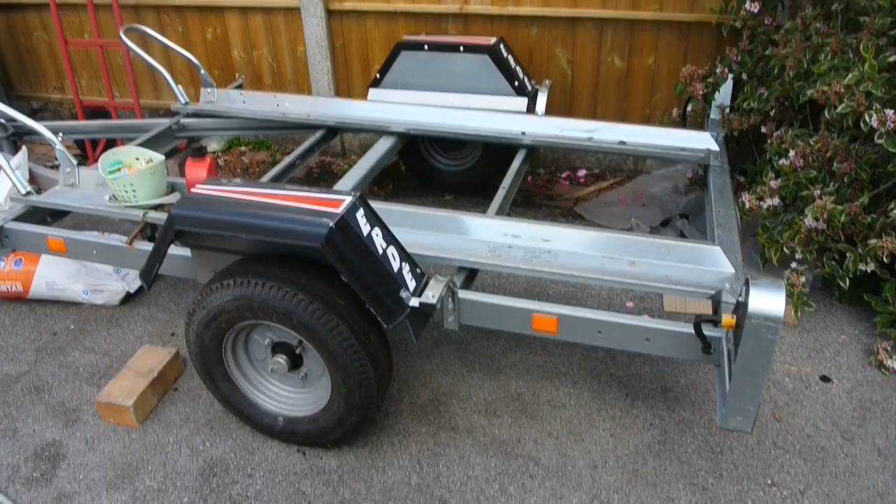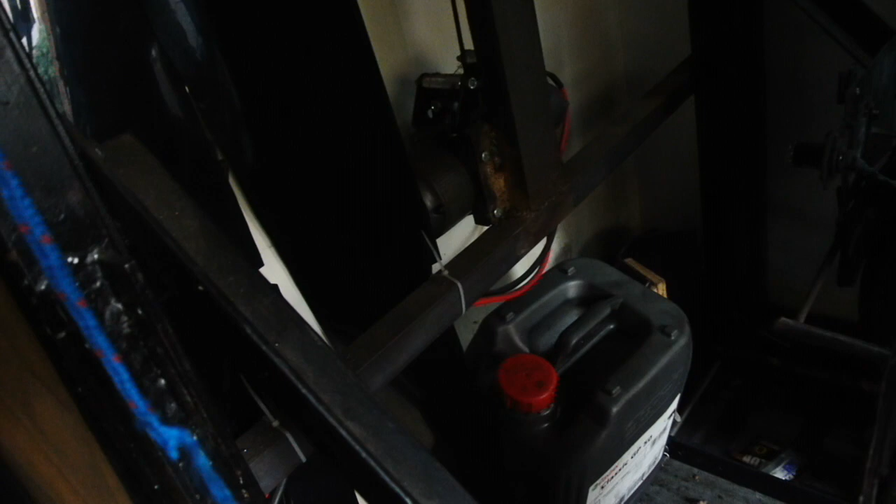It comprises some channel along the ground with a vertical here and 4 pivoting legs, 1, 2 and of course 2 on the back, and there's a dirty great winch in the back there which you might just be able to see, which is connected to this 12 volt battery here, and a switch on the back of the panel here, and it can be used to raise and lower the bikes.

I've had 4 bikes stored in this area, 2 on the top and 2 on the bottom before. It's quite capable of lifting very heavy stuff. It's a pretty powerful winch. Anyway, at the moment, there you see my Humber 350 overhead, horrible exhaust. Do ignore that. That was an experiment gone wrong.

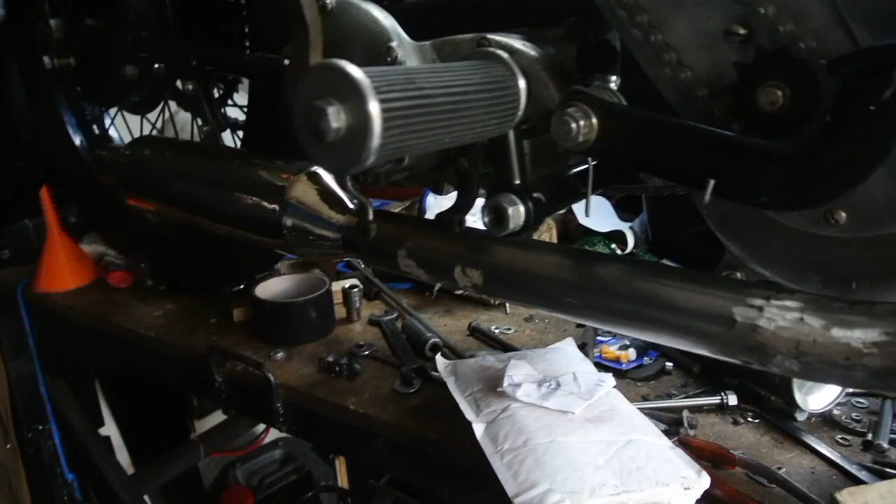But there we see the progress. It looks a lot worse than it actually is because it's almost finished. I'm just waiting for parts back from powder coating and so on, and it's going to be assembled and checked out when I get an exhaust for it. And there we go, there's my...

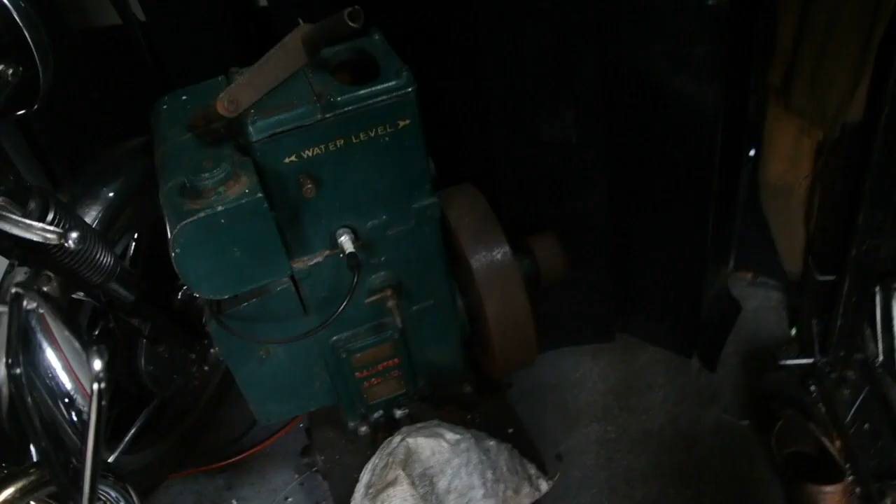Workshop's divided into 3 areas, all of them untidy, which is probably my hallmark, I think. As you can see, shelves everywhere, all along the top, covered in all sorts of stuff. That along the back there's all Humber 350, overhead cam, overhead valve, and even a whole engine in the corner.

If anyone's after a Matchbox float, there's one in that box untouched. Speak to me later and you might be able to buy.

Now then, we'll come through here. These are curtain doors, really good for in winter time. It kind of stops losing heat out of here, and they're just quite effective, you know. They separate the 3 areas. You don't get too much dust and muck from the dirty end of the workshop, which is up at the far end, travelling this far up.

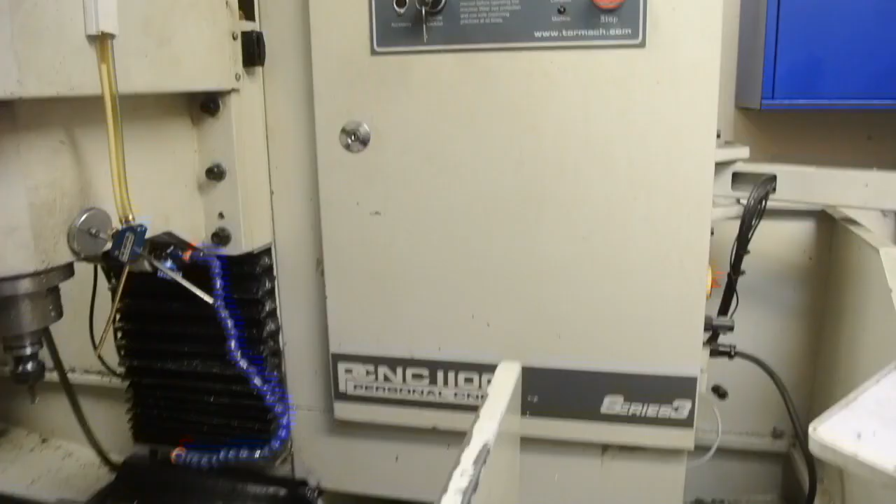So here we go, and this here is the workshop area, which is, I think, what most people were wanting to see. It's very hard in here to get any decent shots of everything because it is very cramped. It's a good little machine actually. It's brilliant, in fact. It's equipped with 4th axis. That's this thing here. So it's more than just a milling machine.

You can generate compound surfaces with it by holding them in here. This can rotate back and forth, and move this way, and this way, that way, and this head can move up and down. So you've got 4 axes. You've got Z, Y, X along the bed, and A, which is the centre line of the rotary table. So that's the machine there.

Another thing with this machine is, I can't really show you it, but underneath here, in that big brass cover, or underneath that, is a lathe attachment, and it's quite good. There we go. There's a screen coming on.

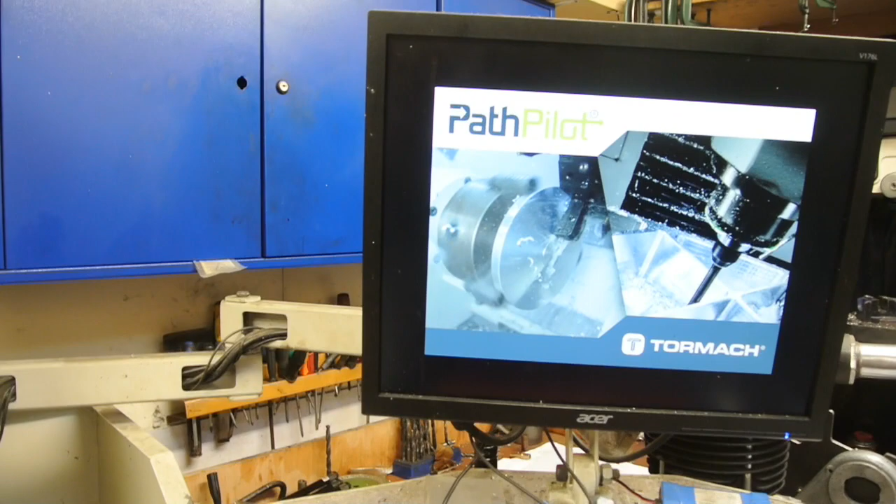Oh, there's someone on a motorbike making a hell of a noise. The A34 isn't too far away from me.

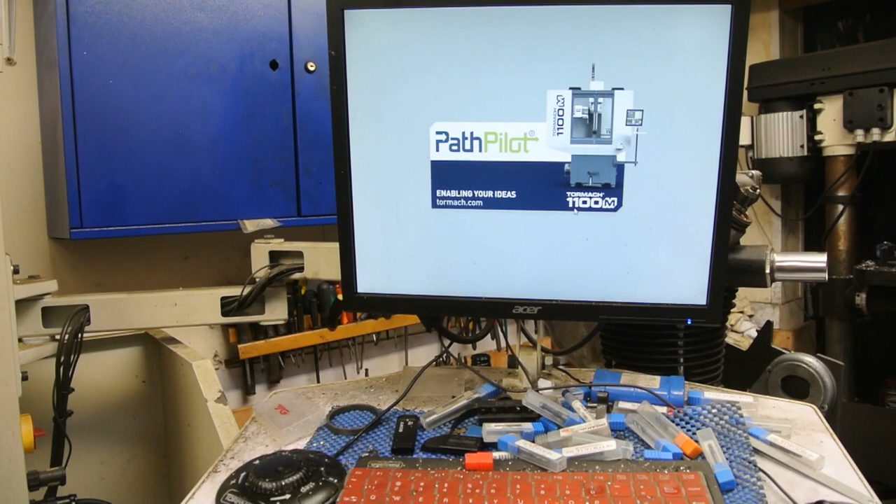And then it tells me there's some kind of fault, and then it comes on. You should say Tormach. I imported this from the States in about 2014, 15, and it cost a lot of money to get it into the country, but it's been worth its weight in gold to me. It really has. It's just so nice to use, very easy to use. It's quite a robust machine, and it does work well.

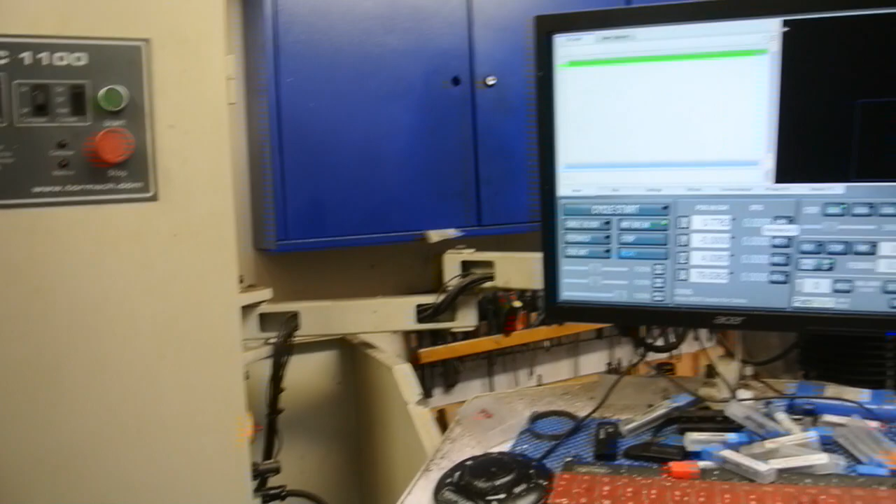So anyway, there we go. That's it on. This is the control. It's controlled by a PC, which is hidden away in the cupboard underneath, and we'll just reset it. And the first thing you ever do is you reference your... and I'll have to be careful because this is very high and it can actually catch on that, so you want to reference the Z first as it goes up. Oh, I can't just do that quite yet. I need to reset that button. There we go, and then I can hit the Z.

And there you see, it's pretty slow this. I need to investigate that. It should go faster than that when it's referencing. But that's Z, and that's clear of the rotary table. X. And there you see the X. And let's click on the Y.

And that's it referenced, so you can then move in the X direction, Y direction, etc. And A, which is the rotary table, and there you see it there.

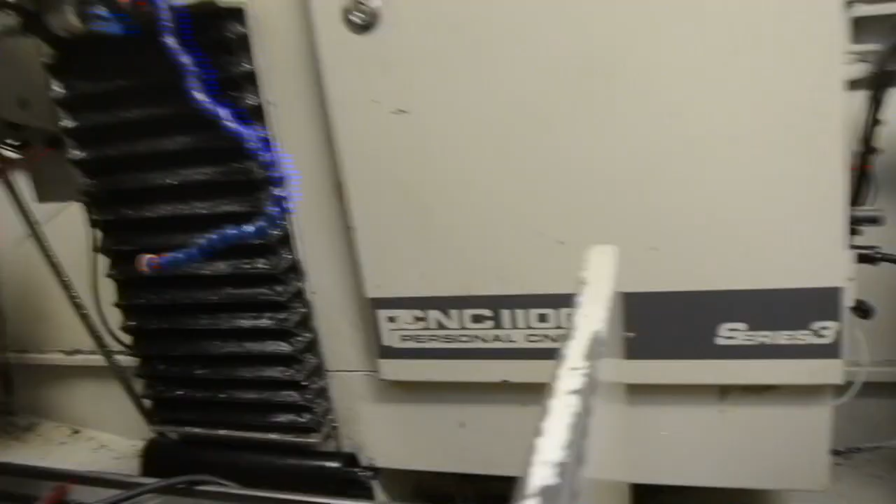I had a lot of problems with this last time I used it, and I couldn't figure out what was wrong, and it turned out to be some bad contacts in this plug here. And it was so frustrating because I was trying to divide something, and it made a right balls of the job. But anyway, that's another story.

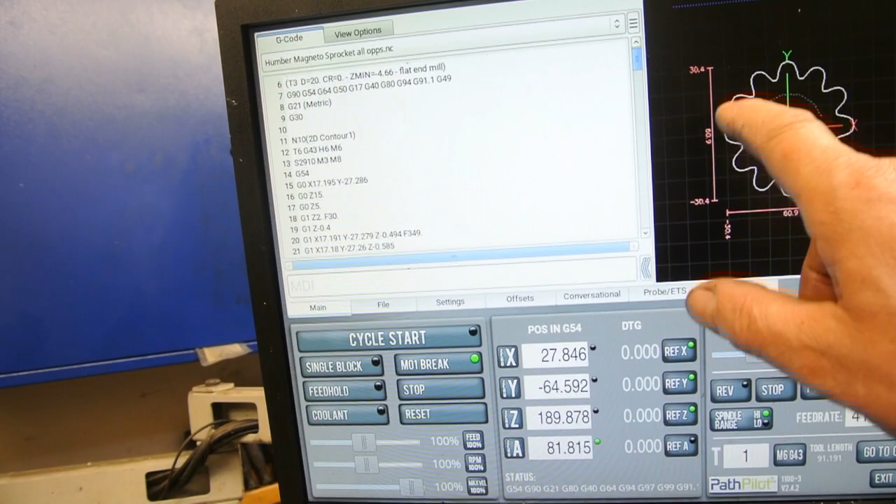And if you look at this, you can see this shows you the tool path that the cutter makes. 6mm cutter, which is actually in there, and it's a 12 tooth sprocket. So there we go, 1 2 3 4 5 6 7 8 9 10 11 12. It looks kind of odd because it doesn't look like a sprocket, but what you've got to remember is it's being cut with a 6mm tool, and it does actually cut a nice profile.

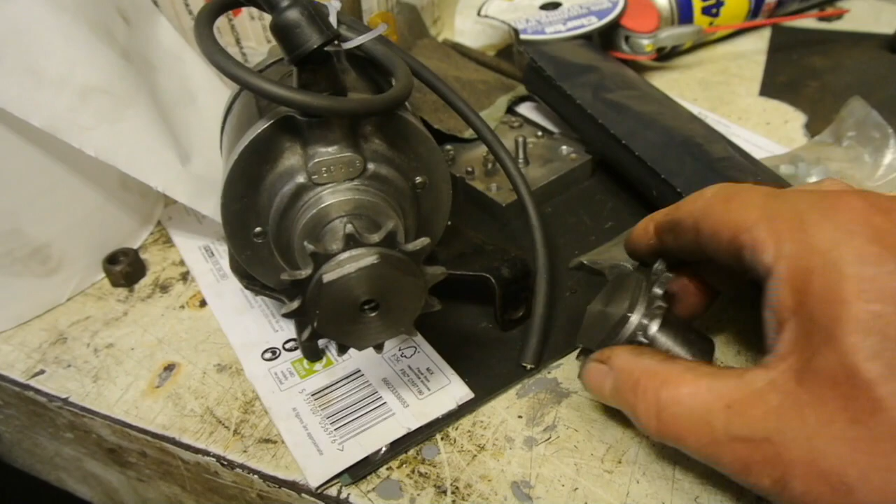In fact, I can probably show you the finished article because I've got one here. In fact, I've got two. There's one fitted to a magneto. What we're talking is the body. This part here is the body of this, and that's the sprocket there.

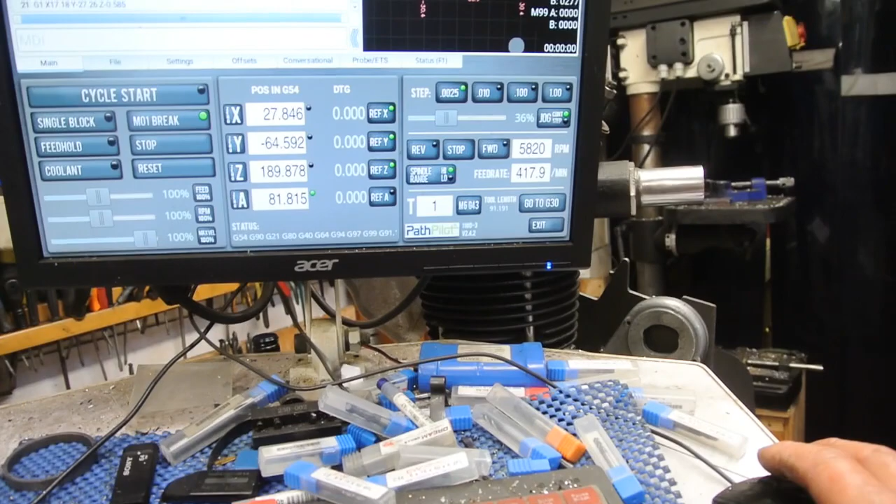So I'll show you what there is on that program. We can maybe run it. That's just the magneto sprocket. So there's 13 holes to be drilled in that. So if I take an isometric view of it on the screen, you will see here 1 2 3 4 5 6 7 8 9 10 11 12 13 holes, and that's the program there that will drill those holes.

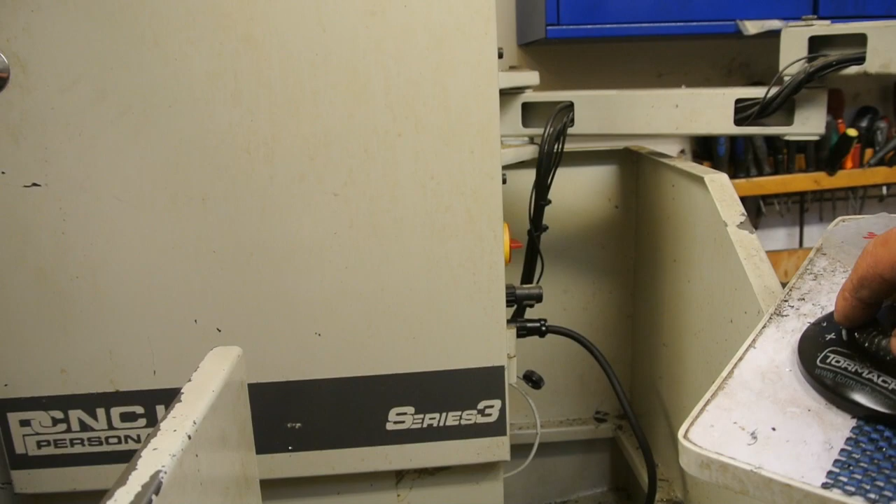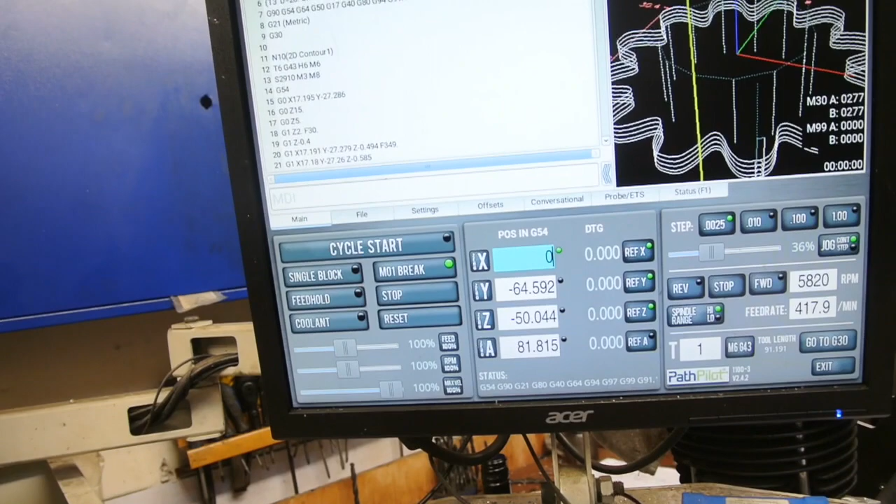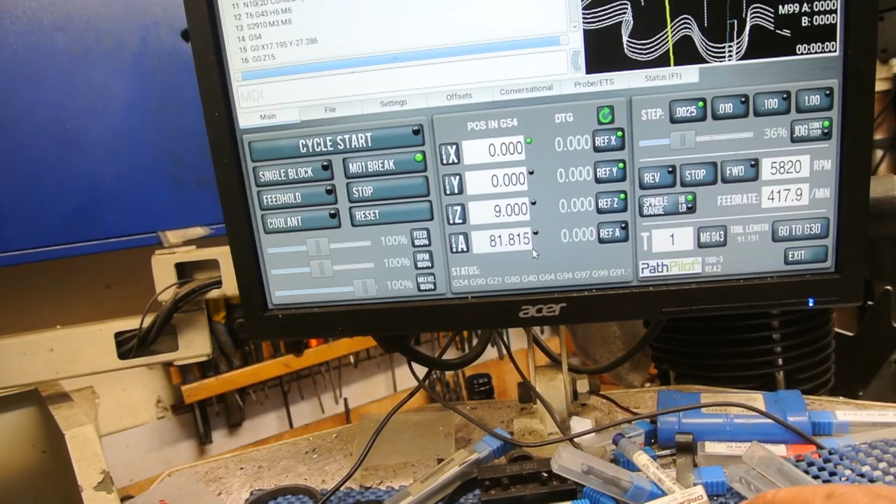I could show you it if I go down here, just say that I don't want to run it into the table or anything, and I want it to be well clear of that head there, so I'm going to say that X equals 0 here. This is reference point for everything. Y equals 0 here, and Z equals 0. Whoop, 0. Come on. 0, enter.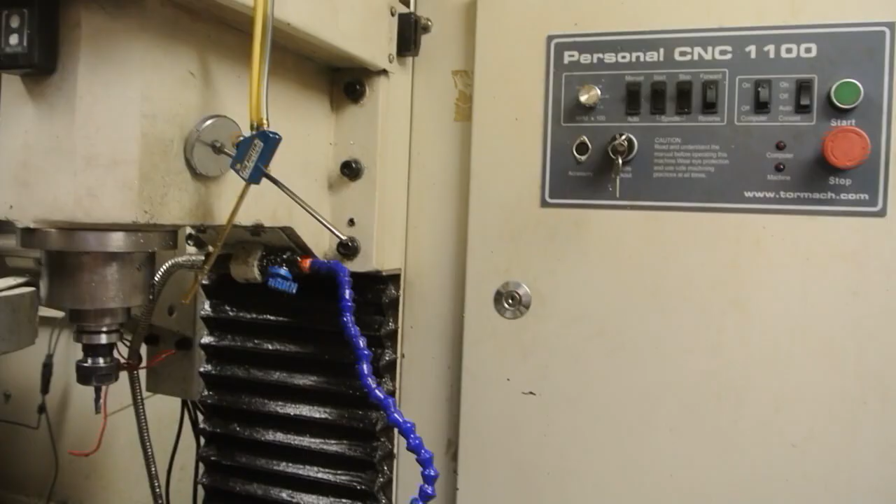I'm just going to turn the coolant off because I don't want coolant flying all over the place. But in theory, I should be able to hit the start button and it should run. So we'll hit the start button, and there you see. Now I'm going to keep my hand on this. I can stop what I'm doing at any time on that. But there we go, and it's going to tell me insert T6 into the spindle. So I'm going to tell it that T6 is in, and away she goes.

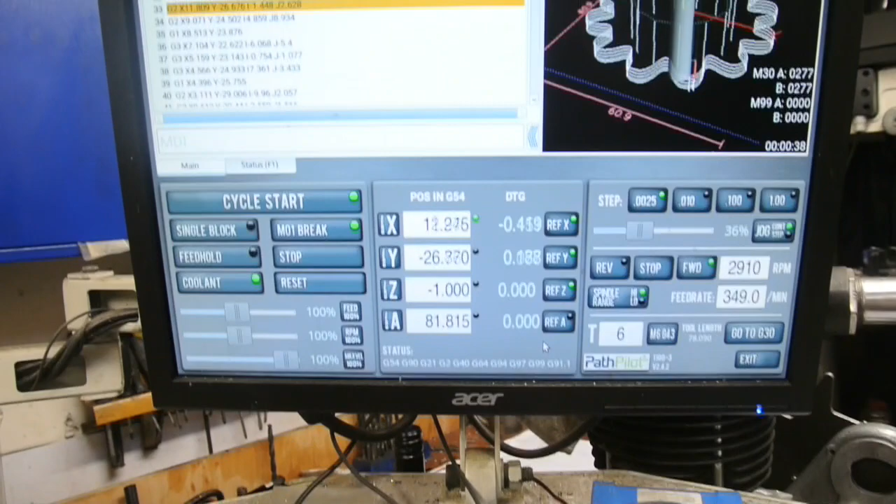And it'll come down, and if I go to the isometric view, you can see there what it's doing now is going down to the first depth of cut, and there you go. You can't see much there, but yeah, you can see it. You can roughly see the pattern it's producing. I don't need any more of them at the moment, so there you go.

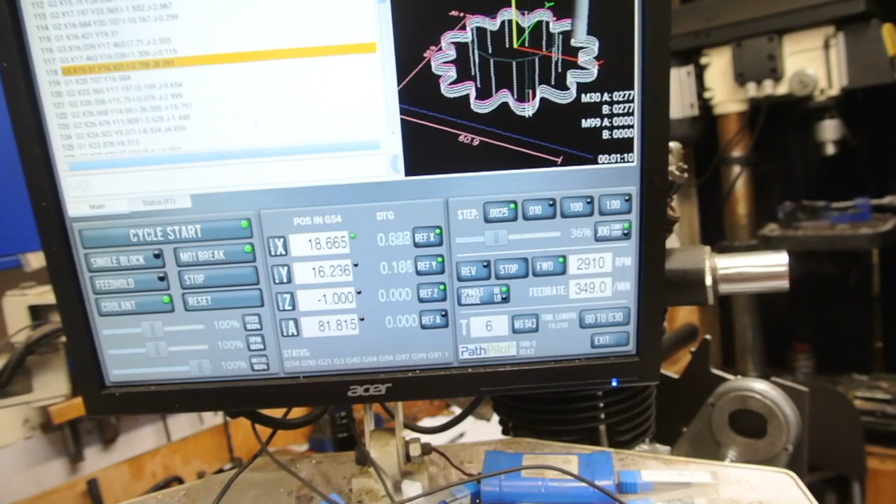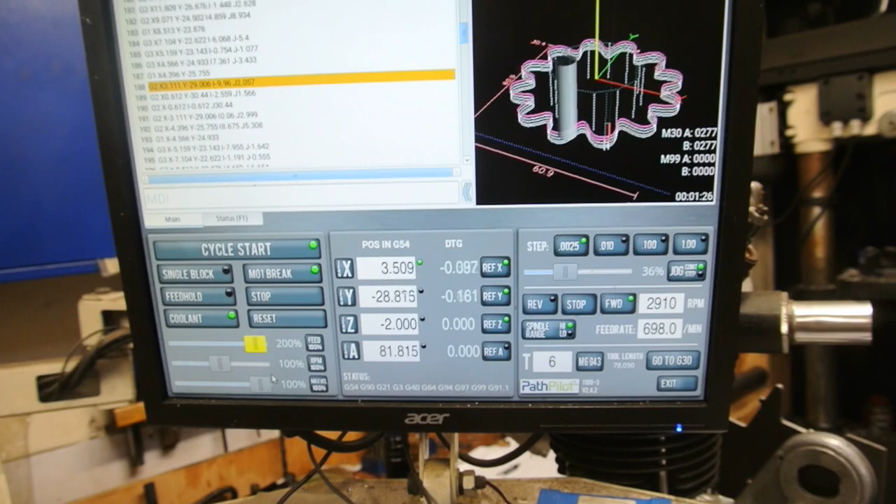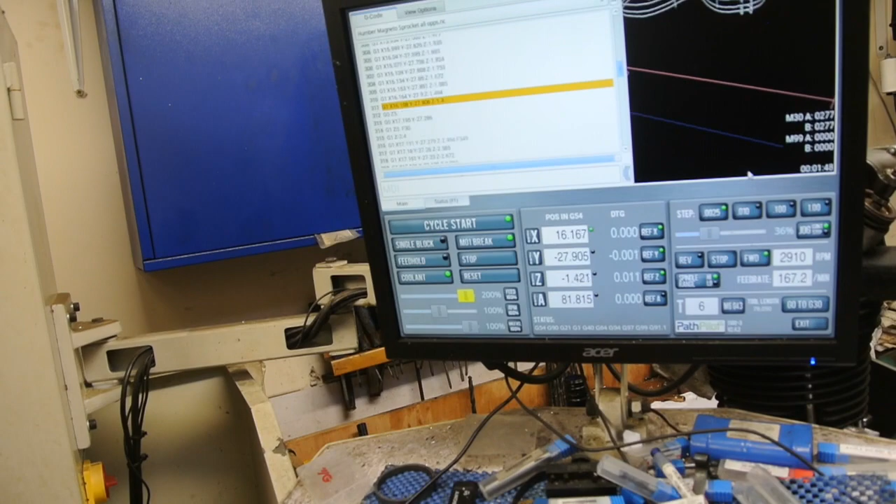That's actually going too fast. If I really speed it up, and there's a second cut, and off we go. And if I blow that up, you can see it's going to take 5 cuts, 4 main cuts and a finishing cut. And you can see it's doing fine there. And that's that one done, and then it will come down again. You can see here, there's the tool coming down, and bingo, and back round it goes.

I don't need to tell you, you would never do it at this sort of speed, not if you wanted the tool to stay in one piece. The cutters I use are nearly all solid carbide. There's a few there. On the table here there's probably 200 or 300 quid's worth. They're not cheap, but they work well. And there it's going around doing the 4th cut.

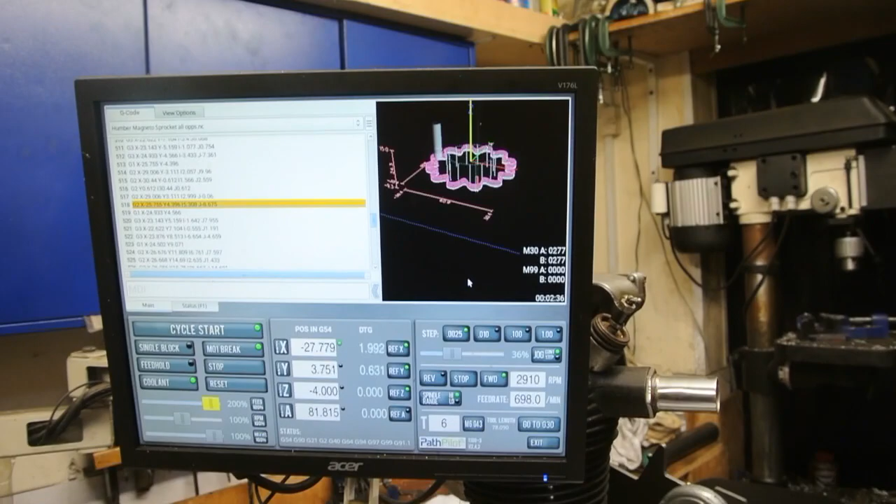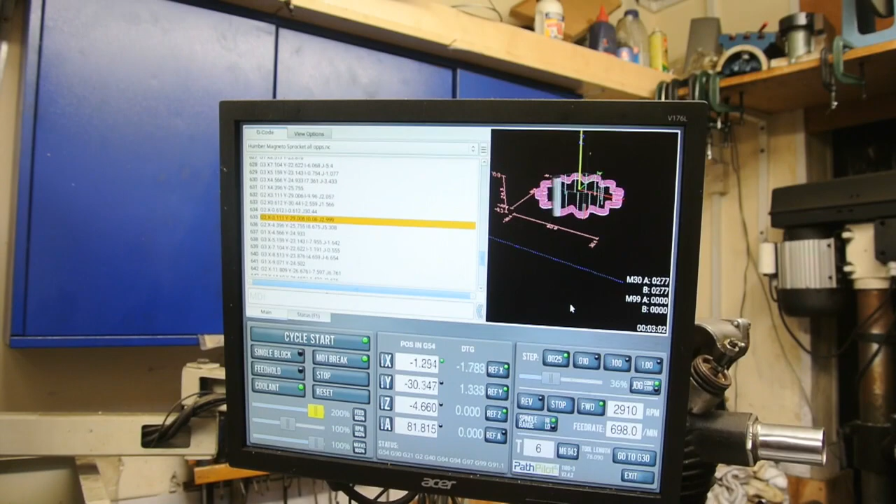And what we'll do, I'll show you the next phase of the program. So that would be... I don't know why I said I was doing the body. This is just the sprocket, all the operations on the sprocket. It's not actually all of the operations, because the sprocket also has a hole in the centre, which I did using what they call conversational programming, which I'll show you as well. But there we go, it's coming around here. It's going to finish this last cut.

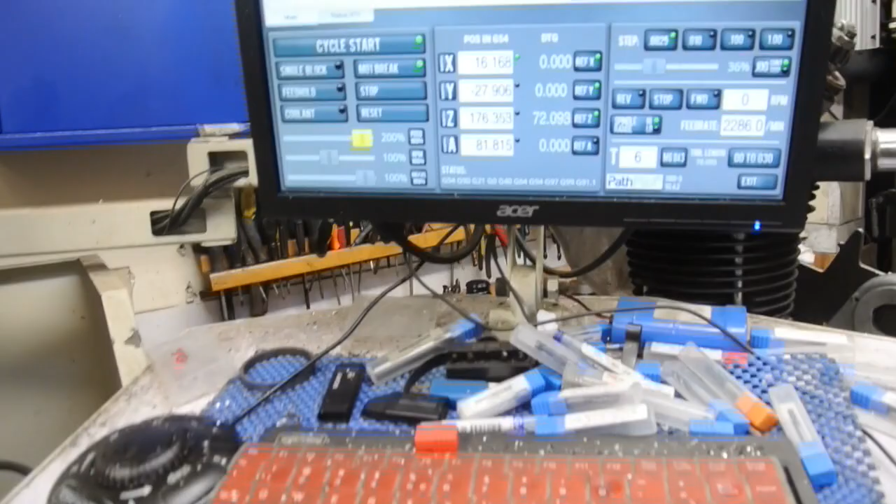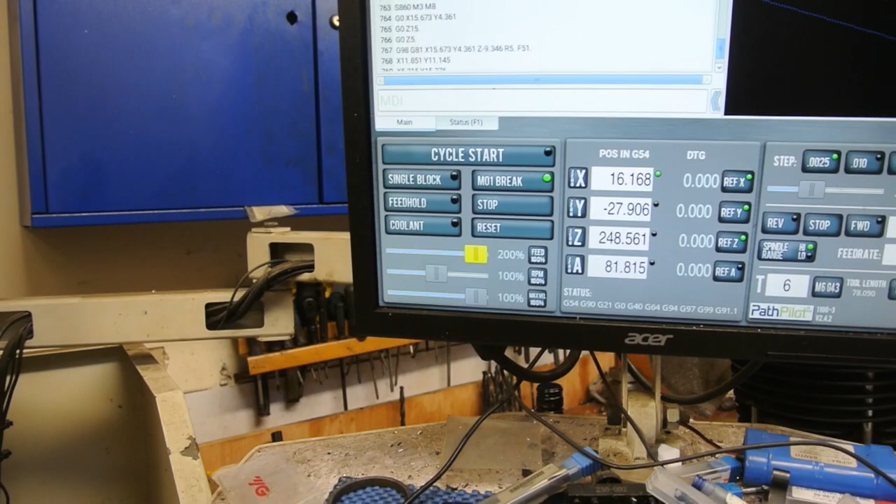And there it goes, it's finished that. So it'll come back up, and then it's going to ask me to put the drill in. Or it should do, which will be tool number 8 if I remember rightly. No, it's not. We'll click on that, and it's going to tell me insert tool 2, which is the drill. Right, so I'm going to say, yeah, we've got that in. And here you go, it's going to come down here and do 13 holes.

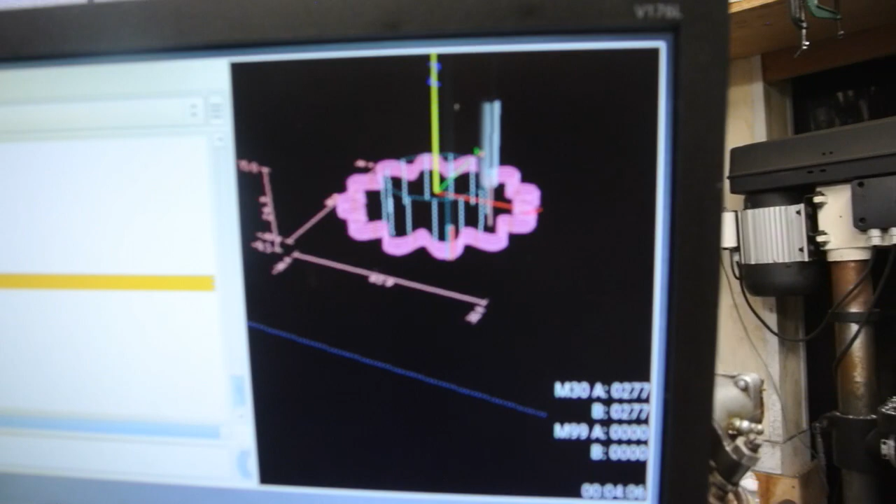And there you go. And you can see on here. And we'll take just looking at the tool there. I've used this to make all sorts of nice shapes, you know, some different sorts of shapes. I'll show you 1 or 2 things that I've done with it that you just would find extremely difficult with either a lathe or hand milling machine.

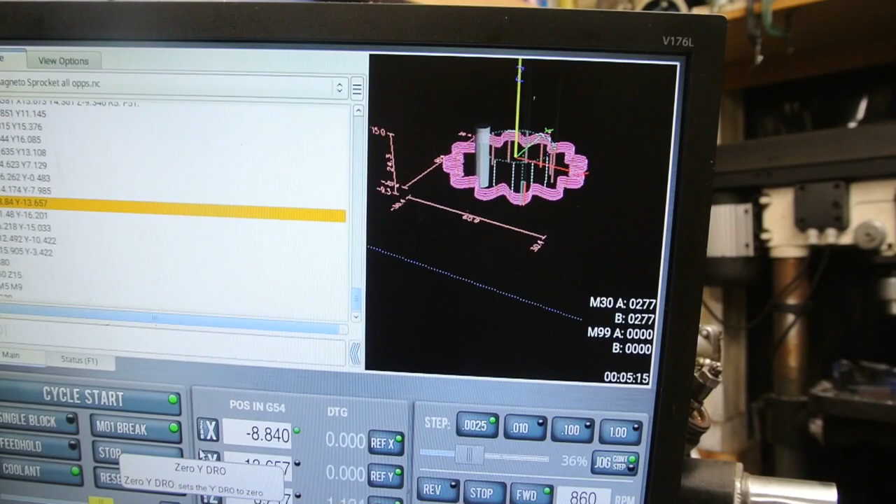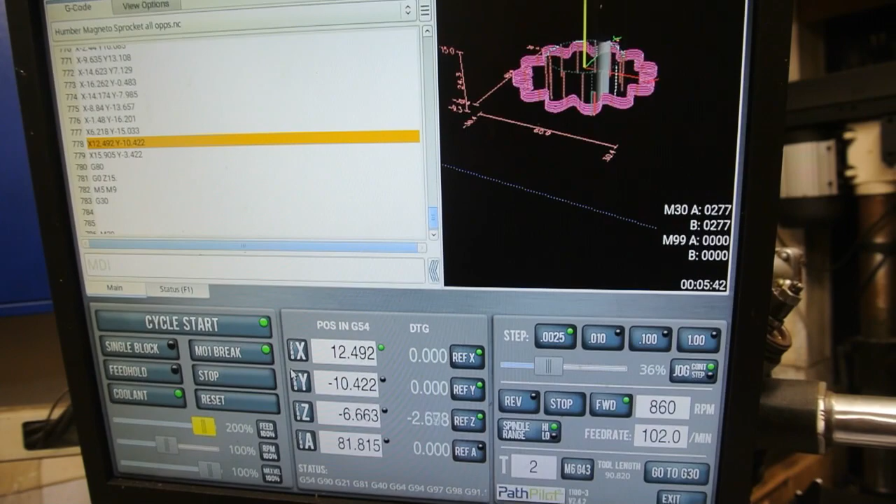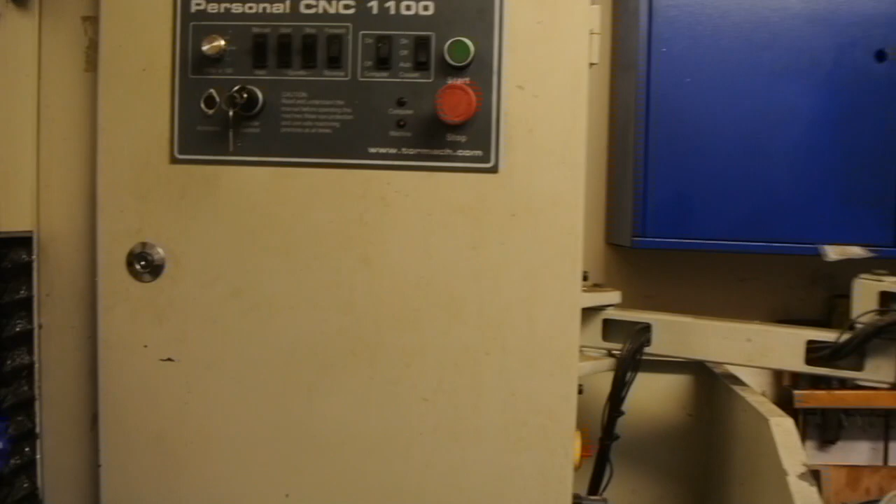And it's coming around. It's only got about another 4 to go. Here we go, 3 more. And that's the last hole, and there we go. And what happens, where it says G30 there, it's going to go back up to where it started from and finish the operation. And there we go, that's the end of that program. So there you can see, it's quite a nice sort of tool to have.

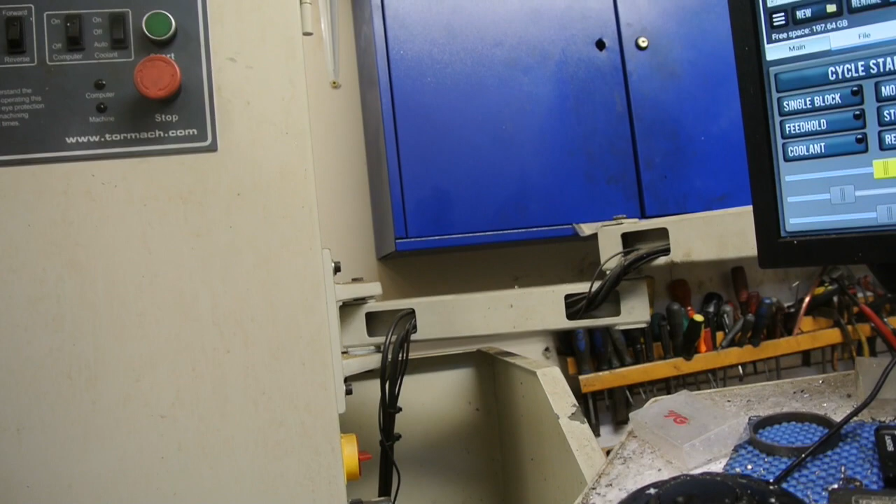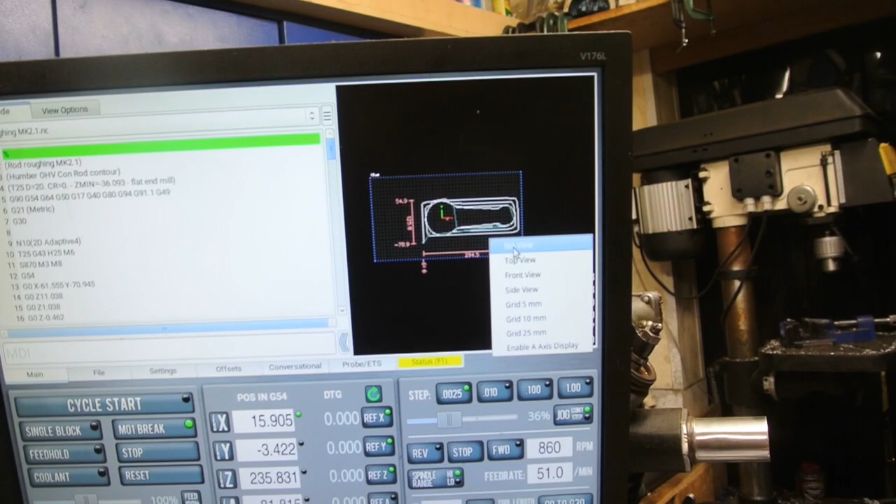What else have we got? Rocker boxes, stock removal, rocker box profile, bore cylinder. I mean, I've done a few cylinder bores on that. Rods, face. Oh, there we go. Face rod waste, Conrod sheet, Conrod roughing Mark II. Don't know what that is. There you go. That's a Conrod being roughed out from a solid piece of metal. I think that was a Humber Conrod, and it's now in that bike that you saw at the start.

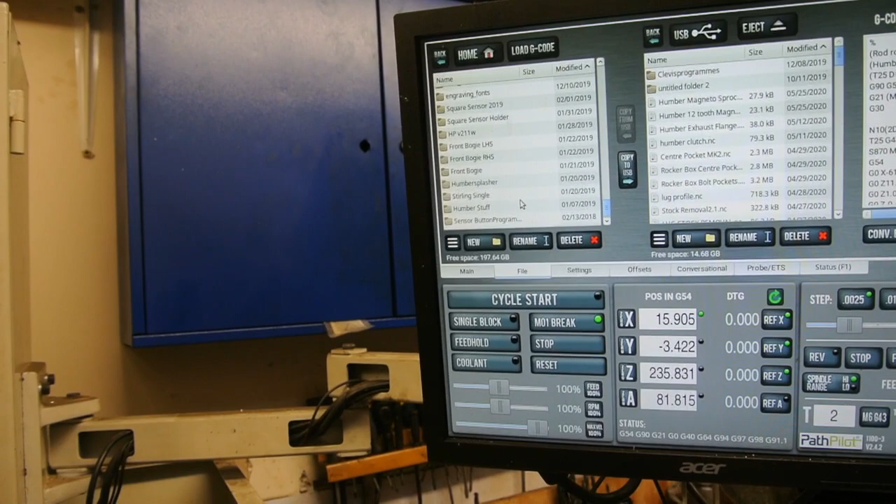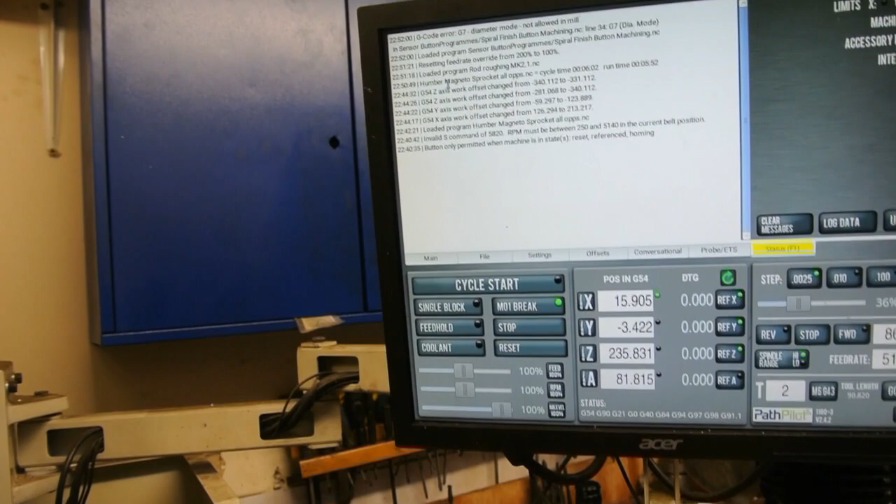So that's some of the things. Plenty more, you know. I've done, as you can see, well, I wouldn't say thousands, but an awful lot. Sensor button, I don't know what that one is. Oh yeah, this was for my neighbour, I think. Yeah, I remember it now. There were about 1,300 of these things I had to make. Little buttons, round stainless.

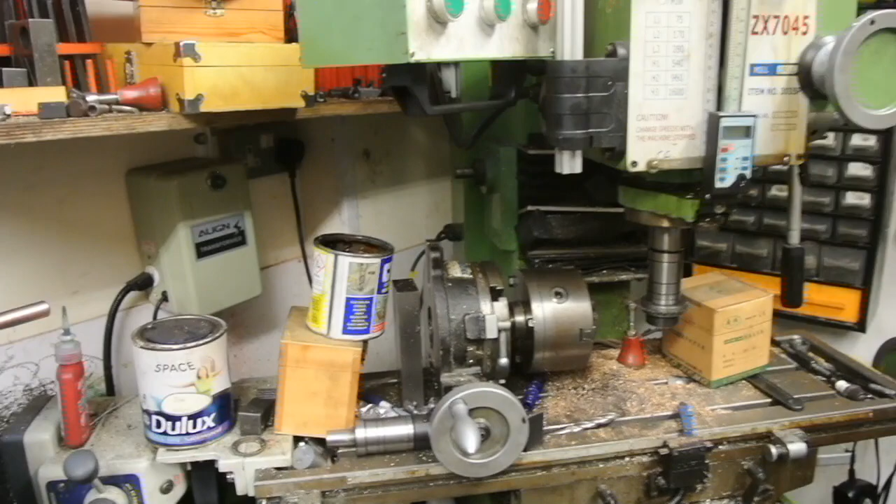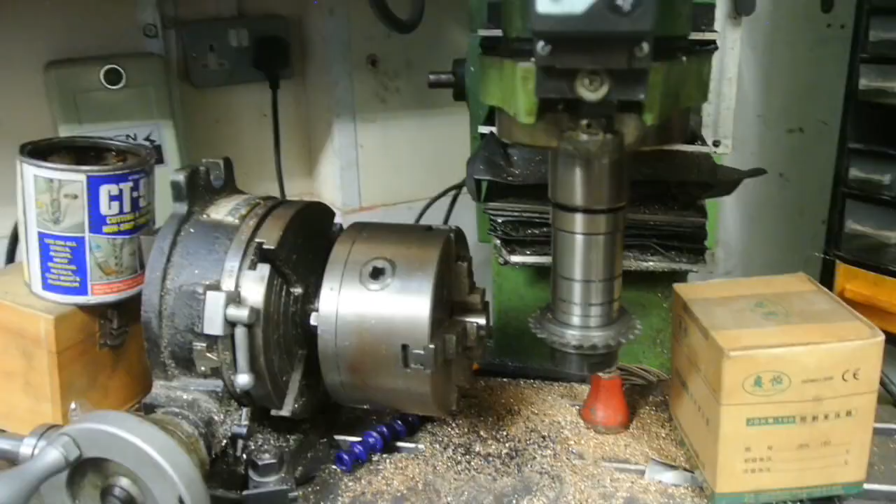Okay, well, this is my Warco manual mill. I use this if I need to mill something and there's a job tied up on the CNC machine, I revert to this one. I don't do a great deal on it, but it still comes in handy. My son-in-law occasionally uses it for some of his jobs. It's not a bad machine, but it's not that accurate, unfortunately.

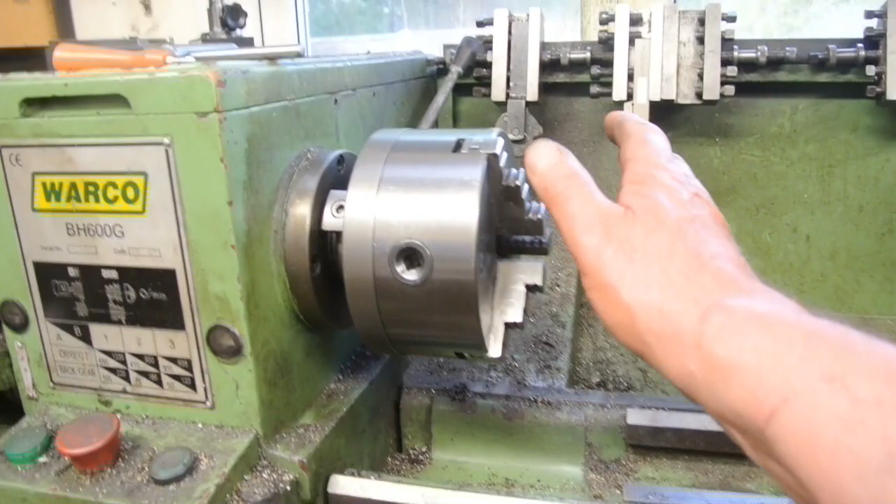And here we go around to this part of the workshop. Here is my lathe, again a Warco product, Chinese, cheapest lathe, but by God, I can't fault it. It's got pretty good repeatability on a 3-jaw. You know, you can turn stuff around, and nearly every time it'll run concentric. You know, 3-jaw chucks are horrible for accuracy. For accurate work, you use a 4-jaw. Always set up a 4-jaw, center it, and off you go.

But if you look at that bed of that lathe, look at the depth of the casting. It's so rigid. It's fabulous. It really is good for what it is. I've turned some big stuff in there. When you take this out of there, you get quite a big diameter in there, and it's generally quite good. I use it an awful lot. In fact, I don't use it an awful lot, I abuse it an awful lot, but it is good.

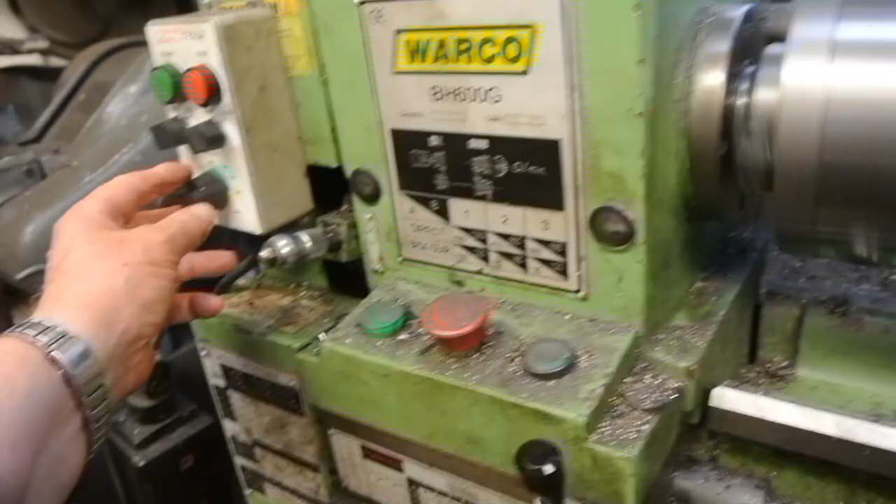One thing I have done to it is I've fitted variable speed drive to it, and here you can see an inverter. That's the inverter on the wall, that little grey box at the back, and you can run at pretty low speeds. Lovely for threading work, it's very good. It's a nice lathe, I like it.

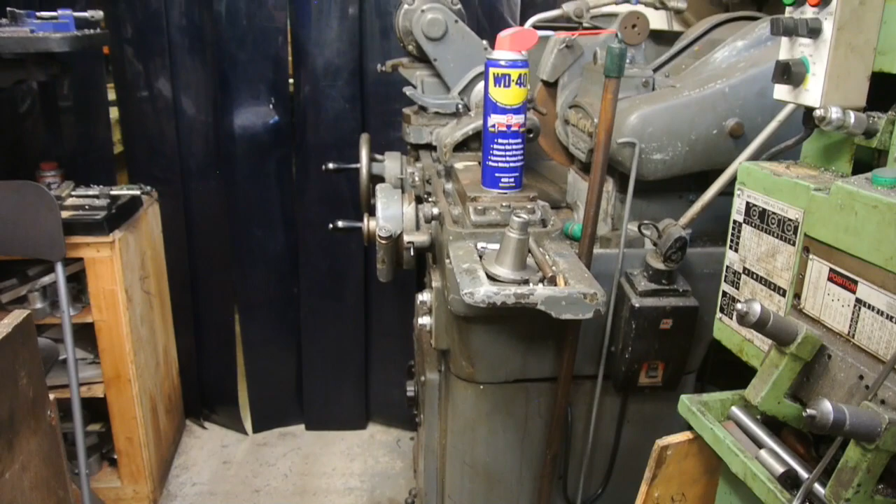The lathe I had prior to that was a Myford. Nothing wrong with a Myford. In fact, they're a damn good lathe, except that mine was getting very tired. I used to do some huge jobs on it, relatively speaking, and it's no wonder I had to get rid of it in the end. It had seen better days.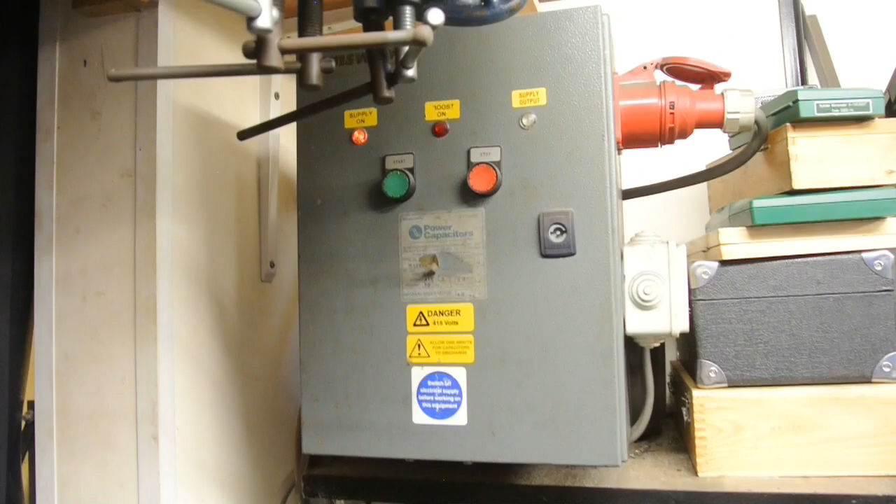But I'm still associated with Myford, because what I've got here is a Myford MG12 grinder. Now, this is a 3-phase machine, and it runs from an inverter, but because there's more than one motor on it, I thought I needed one of these, so we'll switch it on. It's quite noisy.

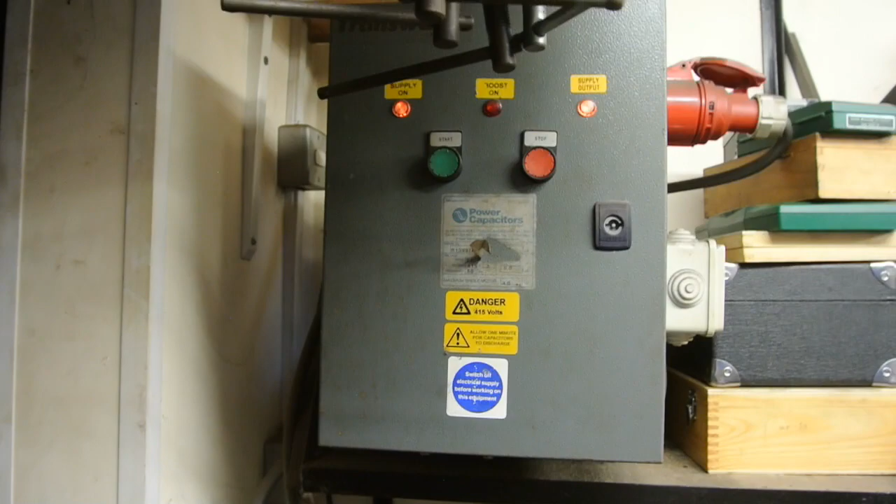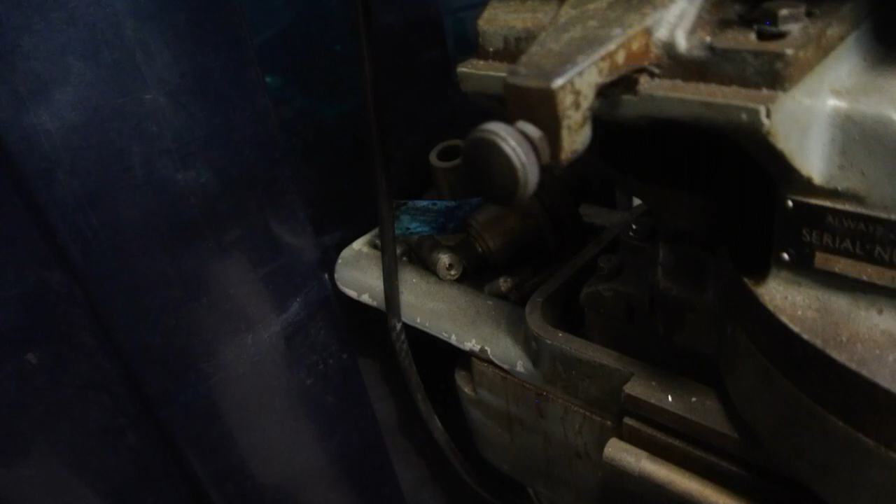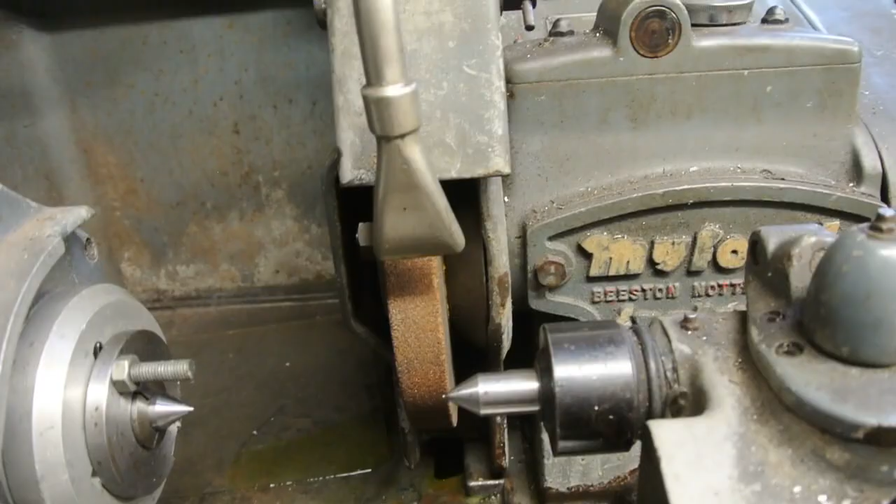There we go, that's the inverter running, and to start her up you hit that and hit that, and there you see. And of course with work in it you go back and forth, back and forth across the face of the wheel. Once you get it set up, it's good. I don't know if you can see it, but there is movement there, but look how many times you're turning this handle for that small amount of movement.

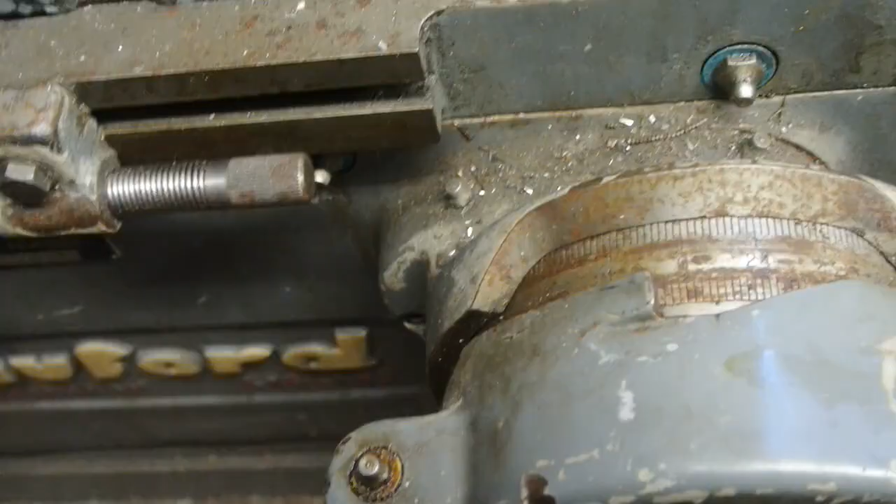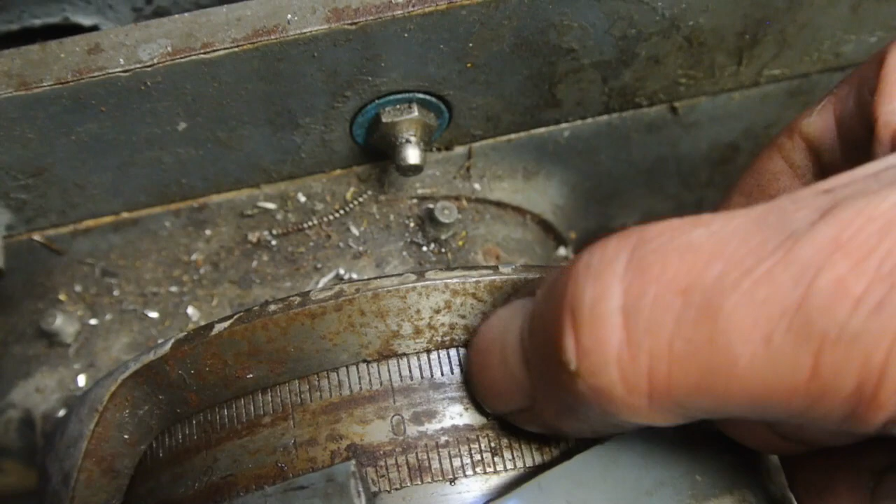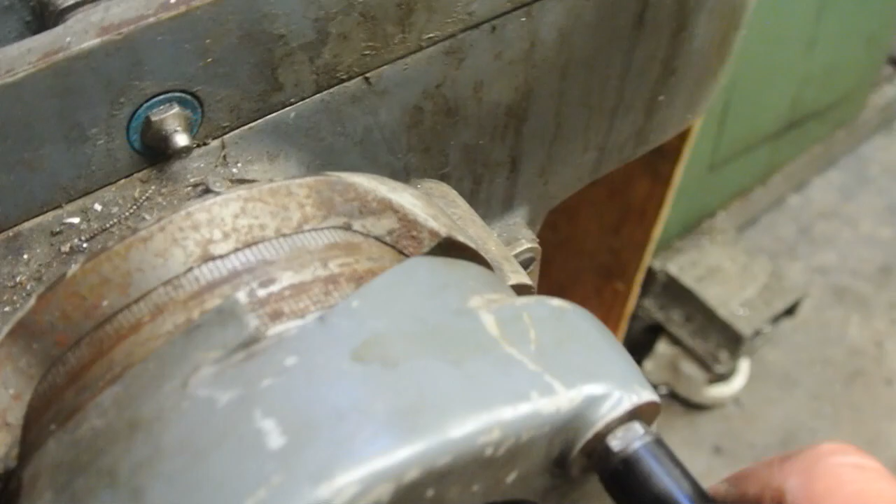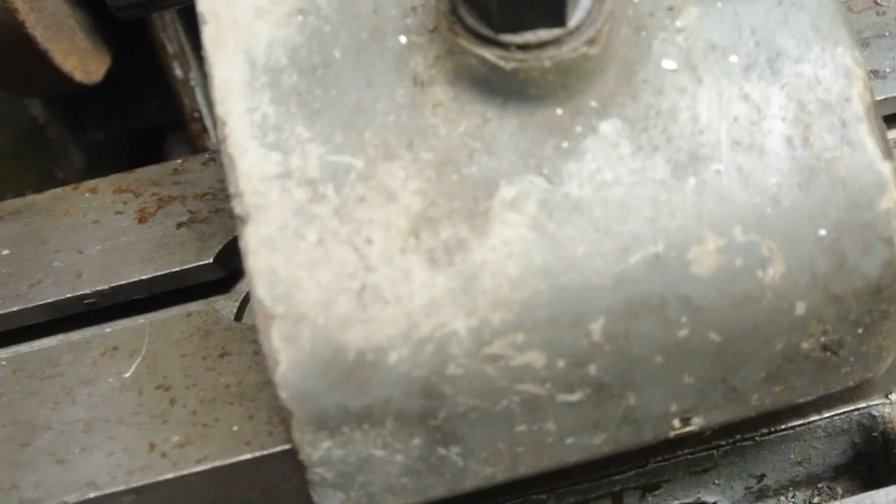Okay, if we look on here, you will see a 0 and a 24. That represents 1/1000th of an inch. Those 10 divisions represent 1/10 of a thou each, so that's 1/1000th of an inch, and one rotation of the handle is 25/1000ths of an inch advancement or retraction of the wheel. However, it doesn't end there, because there is another setting where, believe it or not, one of the divisions on that wheel is 1/4 of 1/10 of 1/1000th of an inch, and it's so fine that you can't really measure it.

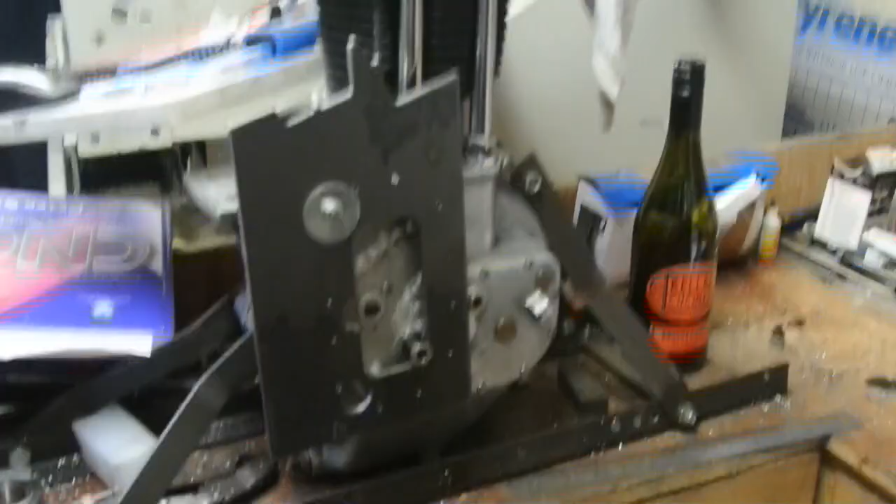Anyway, on the bench, a bottle of wine from watching the Feldon 3 last night. I had to keep myself hydrated.

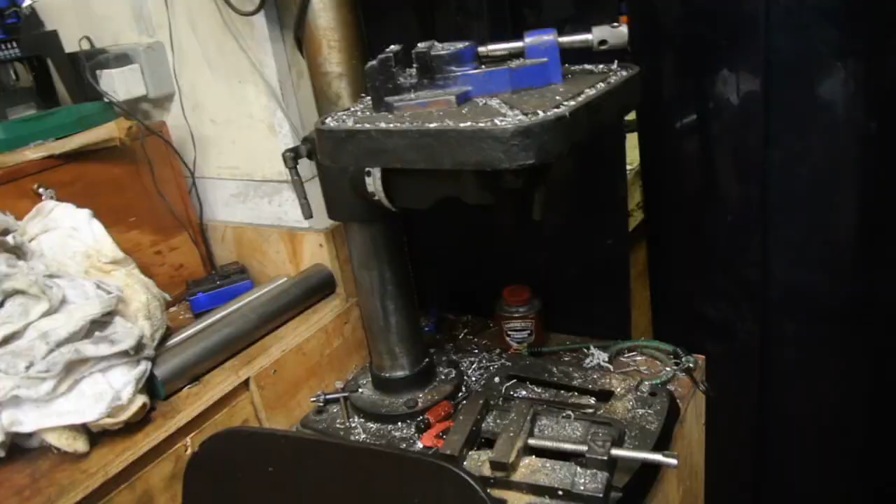And finally, machine wise, the old drill press. I got this one from Axminster Power Tools. It's absolutely rubbish, but it drills holes. You pay your money, you know, and all that sort of stuff. So that's here. And then this is the dirty end of the workshop and the clean end. I do all sorts in here that I shouldn't really.

Down there is a furnace. Now I need somebody who knows all about electricity to get me some nichrome wire and wire it; one of the elements is completely burnt out in it, and it's a great furnace for doing heat treatment. At the moment I've got my first homemade furnace outside, and I've got no real control over it.

Down there's my end mill sharpener. This thing sharpens end mills, hence the name end mill sharpener. It only sharpens the ends, it doesn't sharpen the flutes. So it's good, and I do use it because it produces lovely sharp cutters, and you know, it's worth using for that.

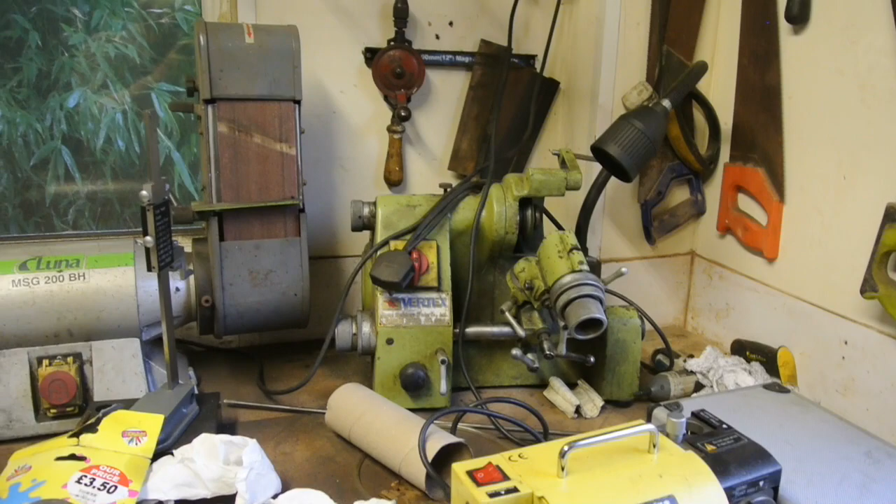The drill sharpener you've seen in my other videos. That's a tool and cutter grinder of sorts. It's a Taiwanese copy of a Deckel tool and cutter grinder, but it's for single point tools, things like engraving tools and so on. And really, like all of these things, it's a pain in the backside to set up, so you give up on it. That's my grinder stroke linisher. I do a lot of rough work on that.

There's some artist brushes. I just use them for pissing about. I'm a piss artist really.

As you can see on the bench, I've been using a bit of heat. That is not oxyacetylene. Acetylene's so damn expensive. I've gone over to oxypropane, and what a difference. Cheaper and just as good in my opinion. I've done a bit of silver soldering. They used to say you shouldn't use it for silver soldering because it's a dirtier flame, but I don't think it is. I don't think it makes any difference.

And finally, what we've got, shelving everywhere with engines and gearboxes. There's another Humber. It's all Humber stuff. There's nothing else up here. There we go. Oh, there's a camping stove. Oh, John would be pleased to see that. I do use that now and again for doing cables.